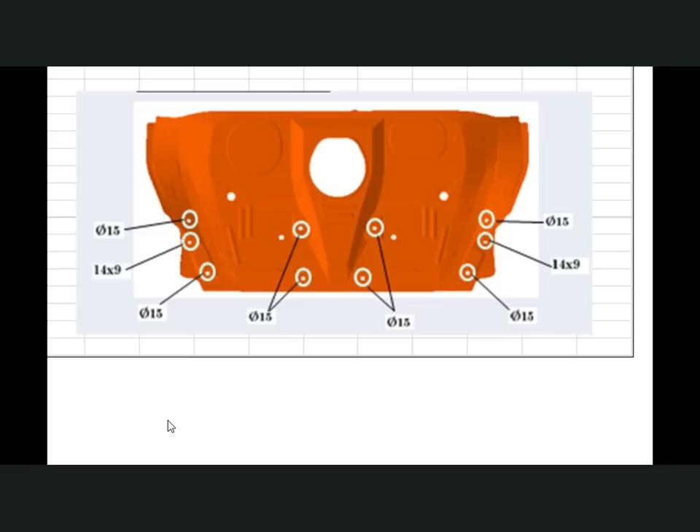In this video we will design the hydraulic punching machine for sheet metal parts. You can see there are 10 holes required in this sheet metal part, all on different surfaces and angles, and we require a machine for piercing these holes.

You can see the IGS data, and there are two datum holes in this main part, along with the piercing holes required for this part.

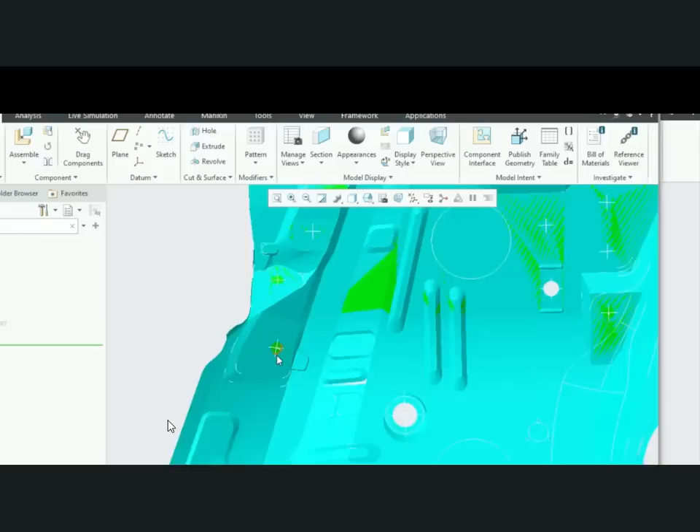The surface of each piercing hole is different, and we require a punching unit parallel to each piercing hole and its surface. We can calculate the angle.

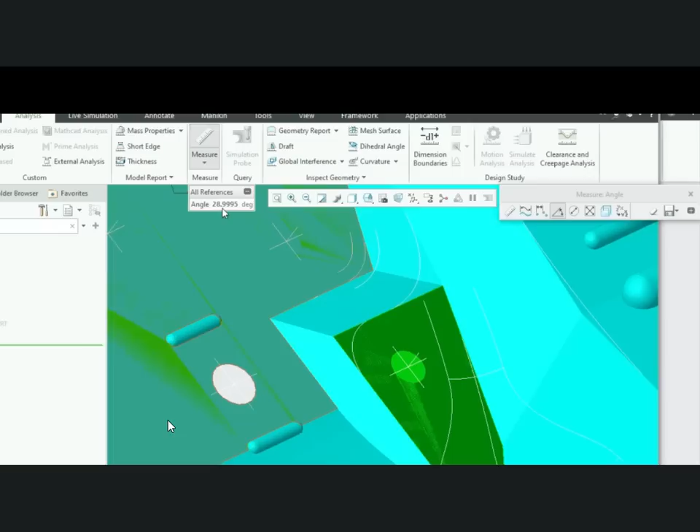There is approximately a 29 degree difference between the holes. So now we require a punching unit parallel to their surfaces to punch the piercing holes as per their required surfaces.

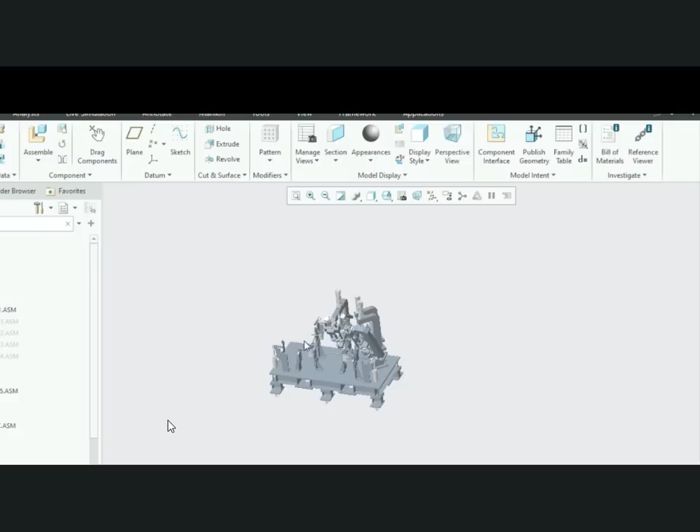Now this is the hydraulic punching machine we designed, and here we hide the punching unit.

First of all, we will see how we clamp the main part in this jig. This is a pneumatic clamping setup for this part.

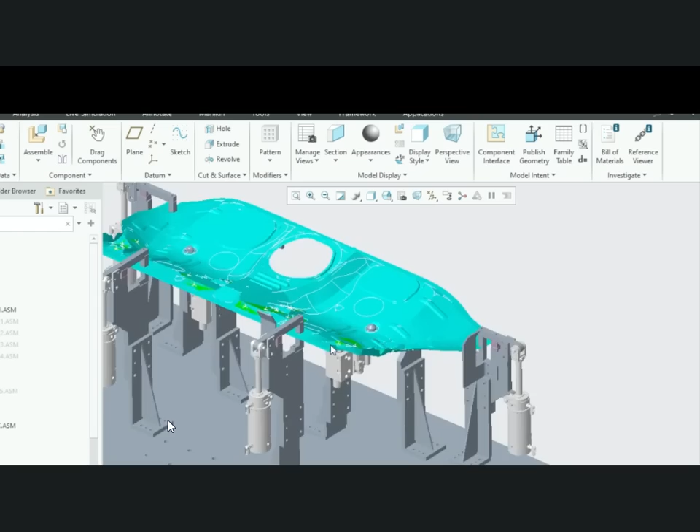There are 4 locators, clamp locators, to clamp the part, and now 2 datum locators.

These are one round pin and one diamond pin, and there are 2 ejectors we install to eject the part after piercing.

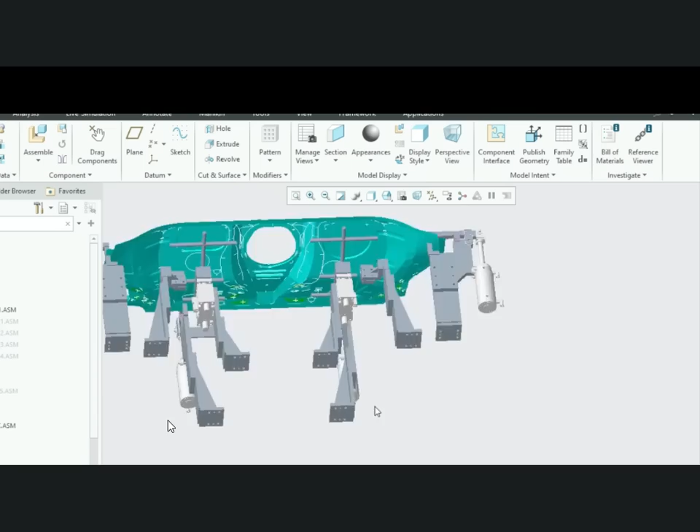You can see very clearly the design of the ejector.

There are pneumatic cylinders installed to eject the part, operating in up and down conditions.

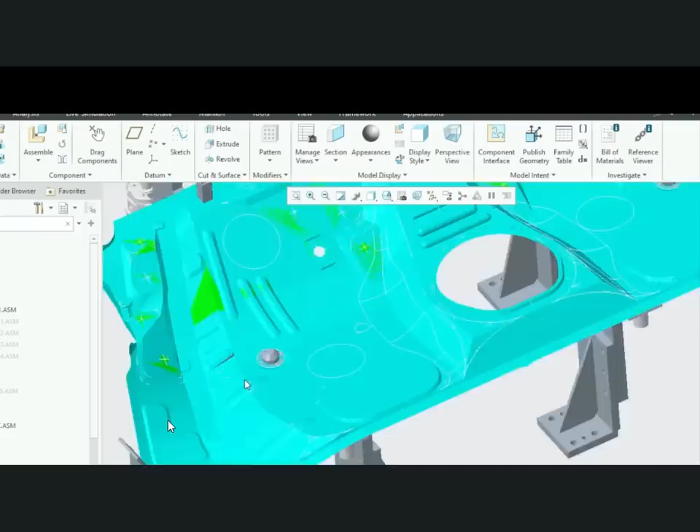And these are the datum pins. You can see these datum pin designs are specially designed as per standards, for this main part.

These are 2 locators, and there are 4 locators to clamp the part and avoid any variation. This is the design of pneumatic locators with cylinders.

Now you can see the datum pin locator design. These are very standard designs.

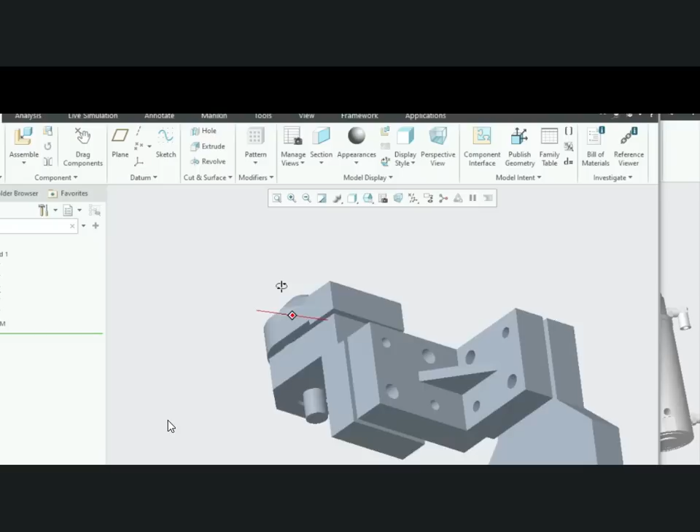And these are the ejector locators, shown separately for clarity. This is the pneumatic cylinder installed to eject the part up and down as per requirement.

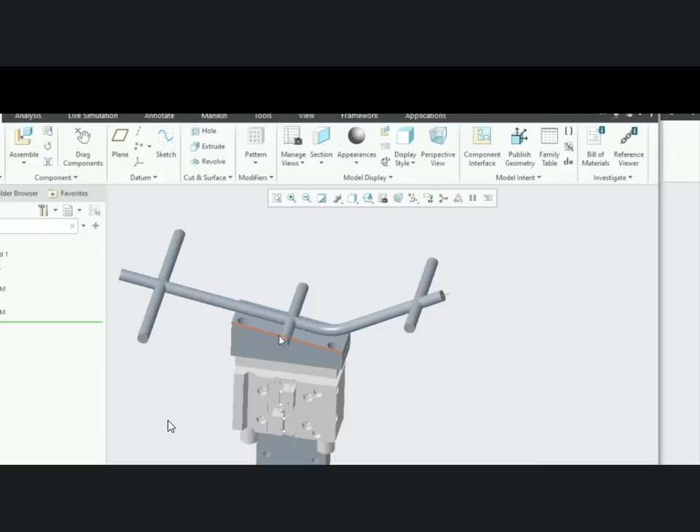This is the pneumatic clamping of the part. After that we will see the punching unit.

This is the main part, the punching unit for every hole, and how we designed it. You can see, and I'll explain.

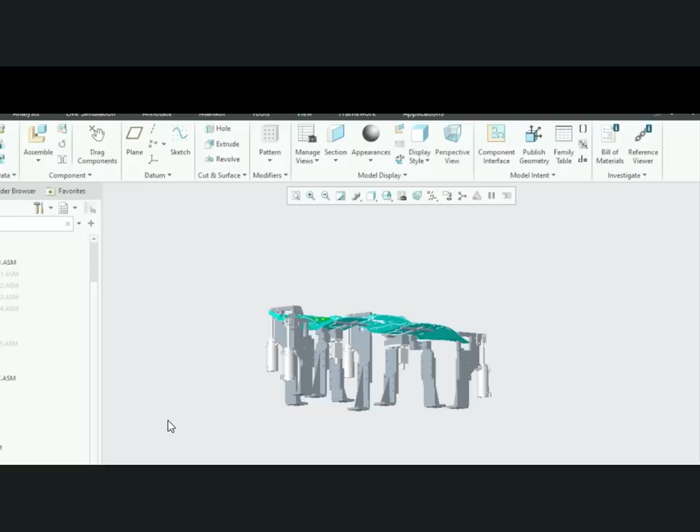This is the base plate for this machine, and we also designed an area for the forklifter.

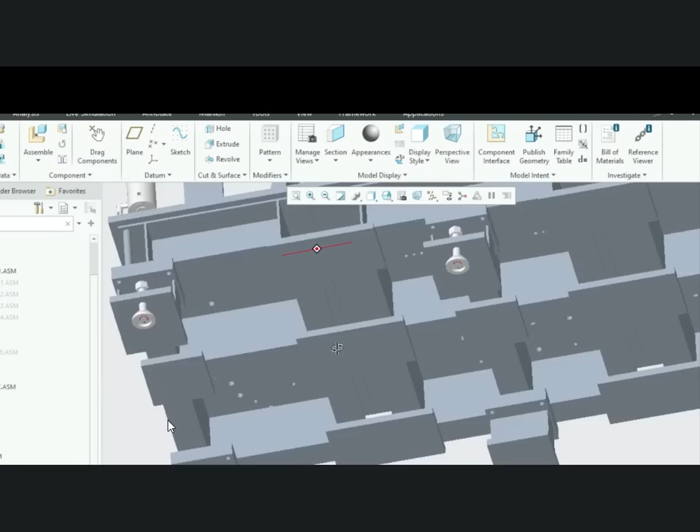This is a very special design to easily shift the jig anywhere in the production line.

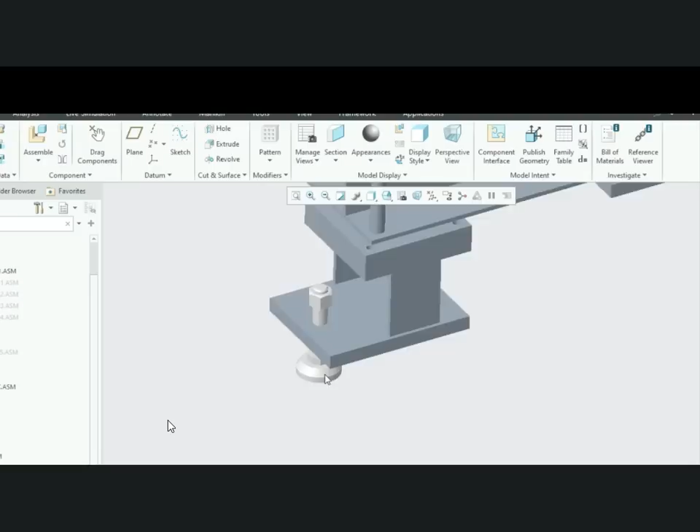We also installed an adjustment pad in this base plate, to maintain the height and levelness of the base plate.

Now we will see the punching unit. This is the first punching unit, and you can see that...

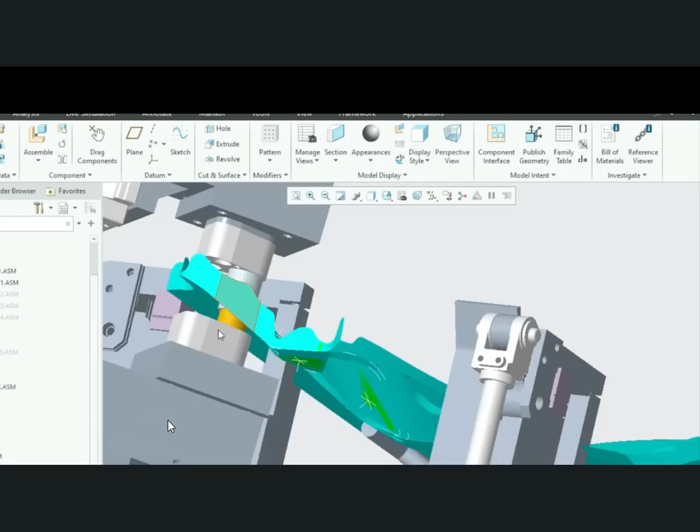the punching unit is designed as per the plane of the surface of which piercing hole we require.

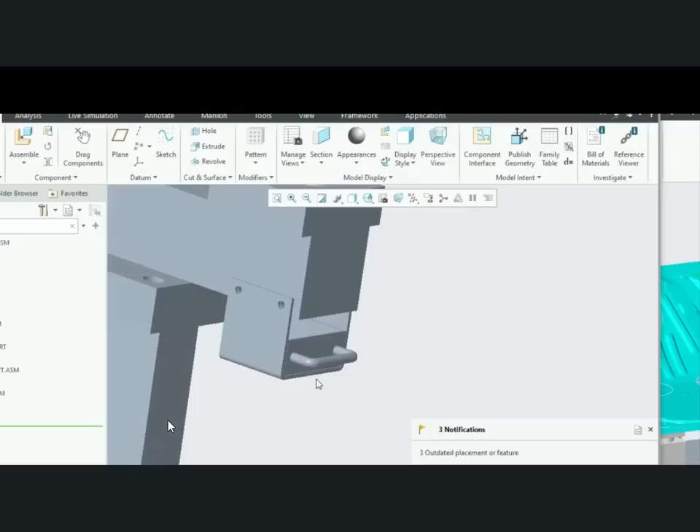Now we can see separately what the design of the punching unit is. These are the retainer for the die insert and also the retainer for the punch insert, which we will install.

It is very easy. There are also 5mm shim spacers installed to adjust this retainer height.

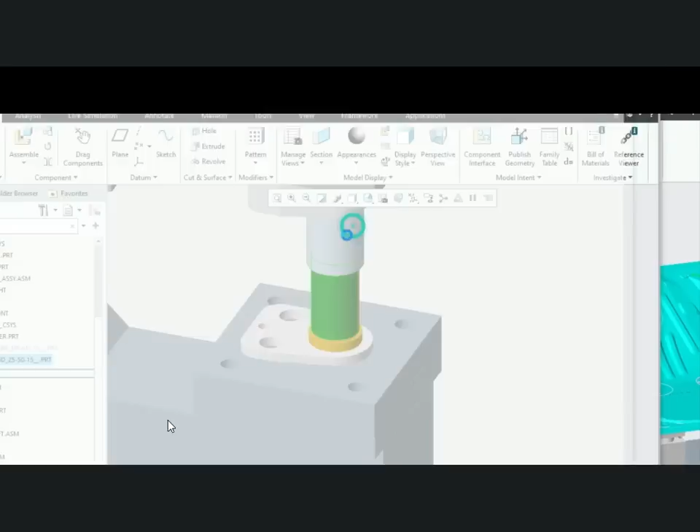And this is an insert, the die insert. Now I think you understand.

This is a urethane block for the punch. We install a urethane block in the punch, and you can see the punch design.

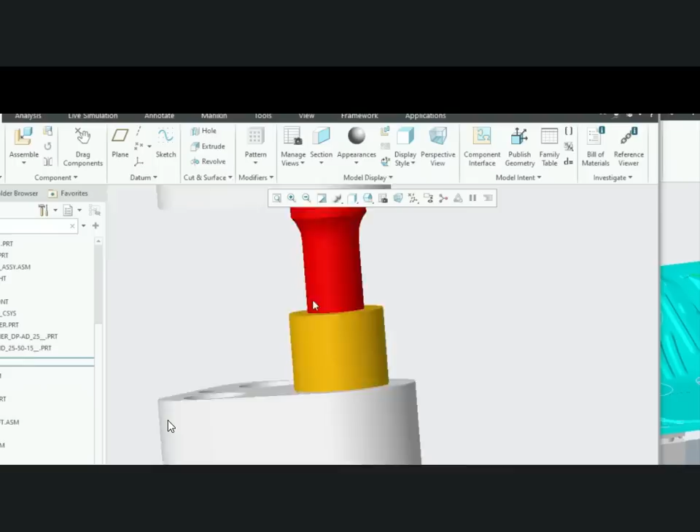It is the same as the die insert. This is the punch insert, which is installed in the retainer as well.

On the bottom side we install the 5mm spacer. This is the retainer for the punch, and this is the spacer.

And this is the punch plate. This is the punch plate, installed separately.

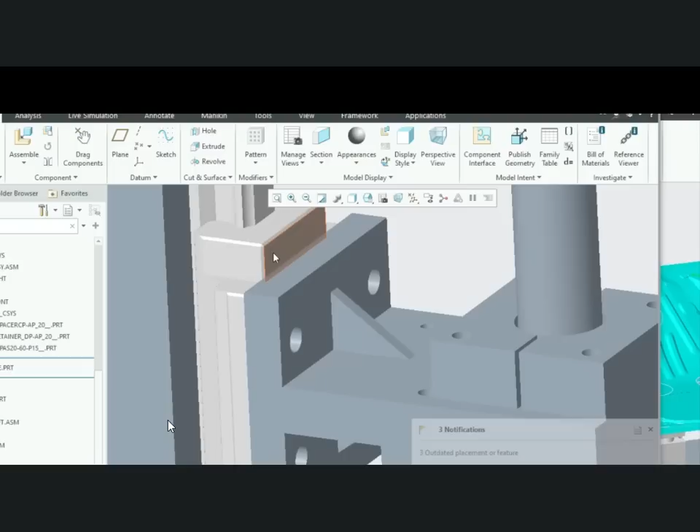This is the upper part, the LM guide support bracket, used to install the LM guide and punch unit. This is a very main part.

This part will be traveling after the cylinder operates.

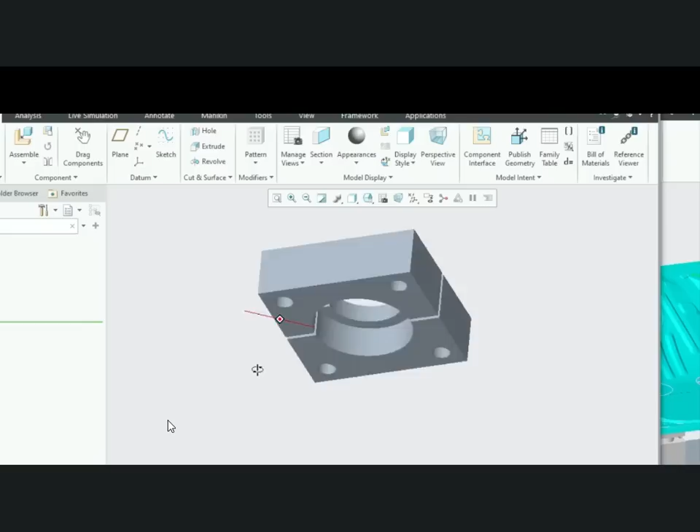This is the coupler unit to couple the shaft, a very special design where we easily avoid any threading as well.

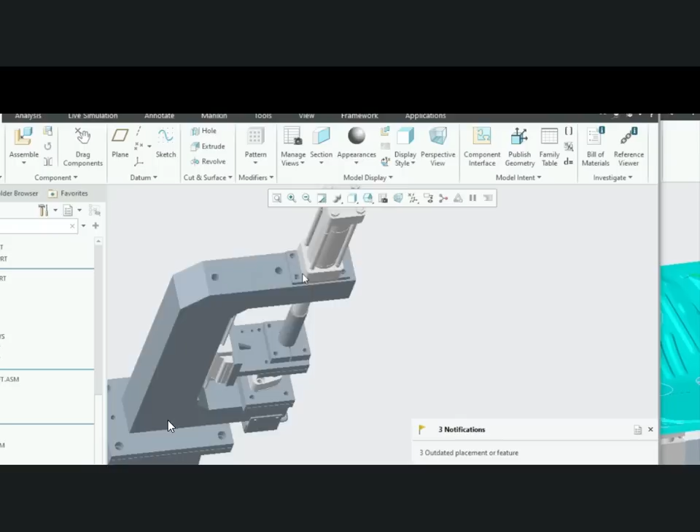This is the coupler shaft, and this is the cylinder shaft. The cylinder stroke is 150, and this is the column for the punching unit.

This is a hole for scrap of the sheet metal part after punching, and this is the main part for this. This is a stand.

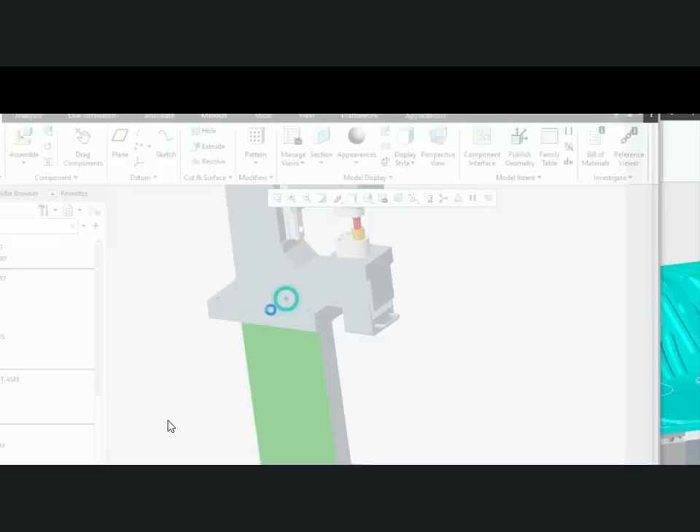The surface of this plate is parallel as per the surface piercing hole. This surface is parallel as per this degree. We will define the degree in this stand.

This is a box for salvage of the sheet metal parts to drop into this box. This is the first unit. You can see this is the first unit for a single hole of piercing.

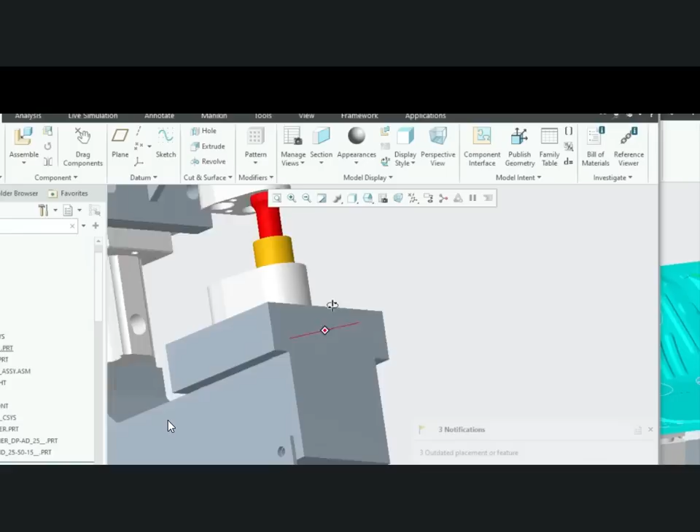These are also die plate, die back plate as well. You can see them installed in this jig, so that it is very easy for adjustment of all parts.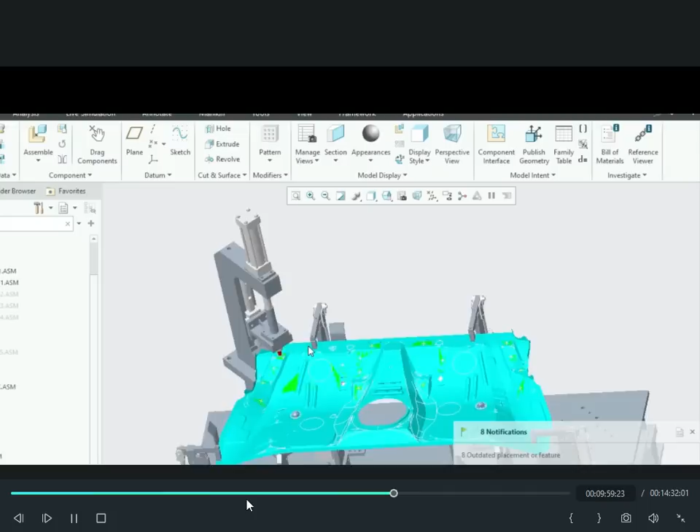This is the second unit. You can see which is very near to the first unit. This is the first hole and this is the second hole for the second unit, same as the first unit, but

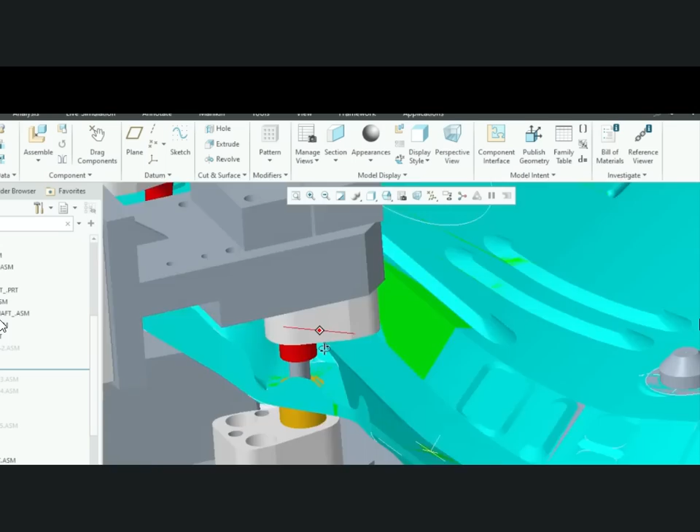the unit is tall as per parallel to this surface of the piercing, and the angle will be defined on the bottom side of the stand. Same as the first unit, same parts we will install for punching, but the angle of the stands are different. You can see the second unit.

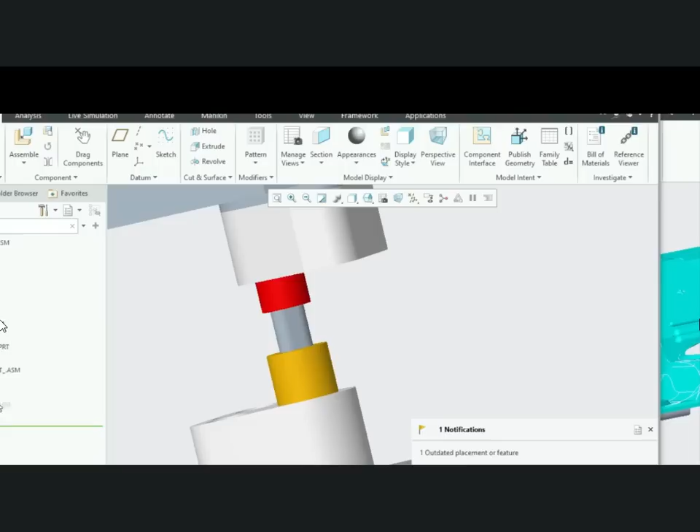These are the same design, same retainer, but the hole sizes are different. This is an oval hole. The first unit is a round hole, but the parts are the same as the first unit.

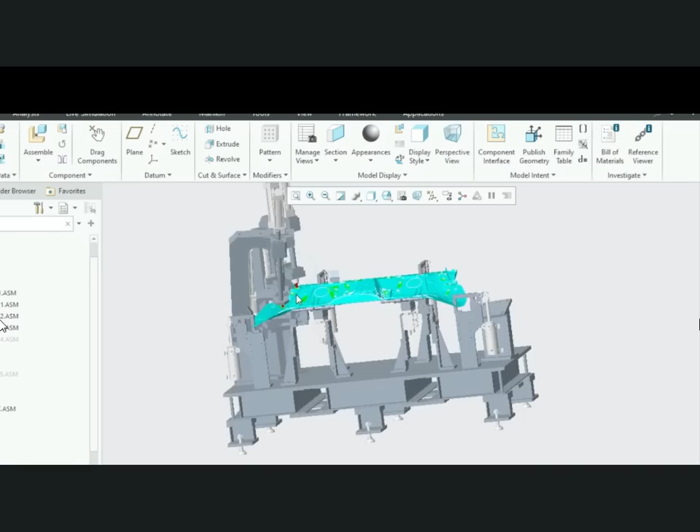This is the third unit. You can see the angle of the third unit. These are parallel to the piercing hole surface, which becomes a 90 degree position. When we punch the sheet metal, it will be at this 90 position.

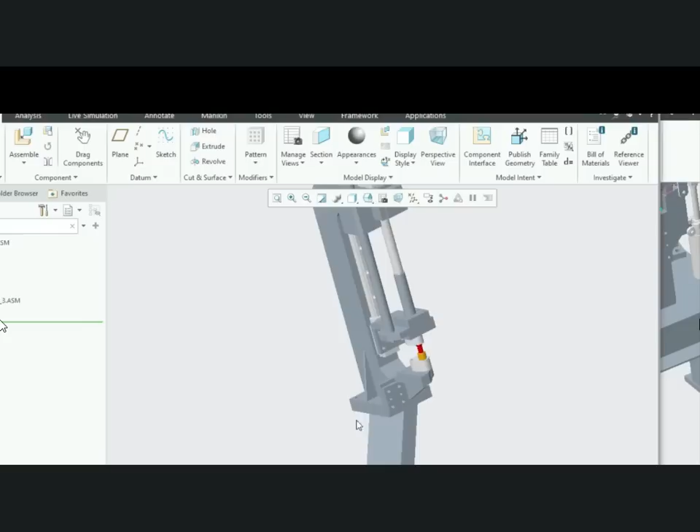So you can see the bottom side of the stand. We will define the angle in the bottom side stand, but in the upper side punching column unit these are the same. In this inner side stand, bottom side stand, we will define the angle.

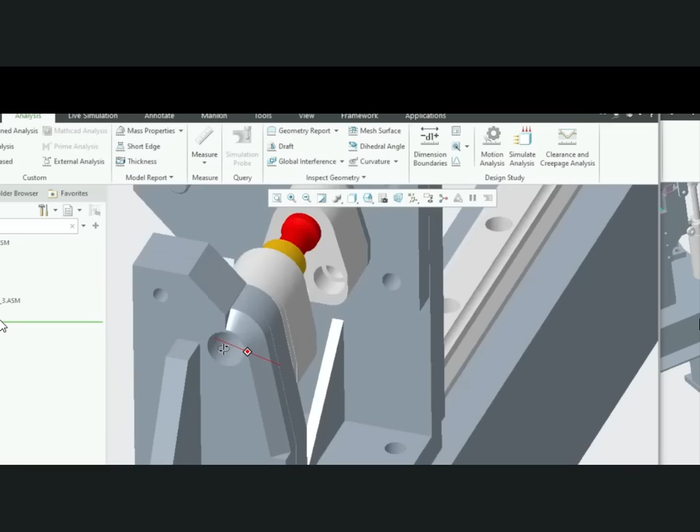You can see the angle we will define as per parallel to the piercing hole surface, and also we will design to verify the interference between the parts and between the other units. It is very necessary to check all things and interference.

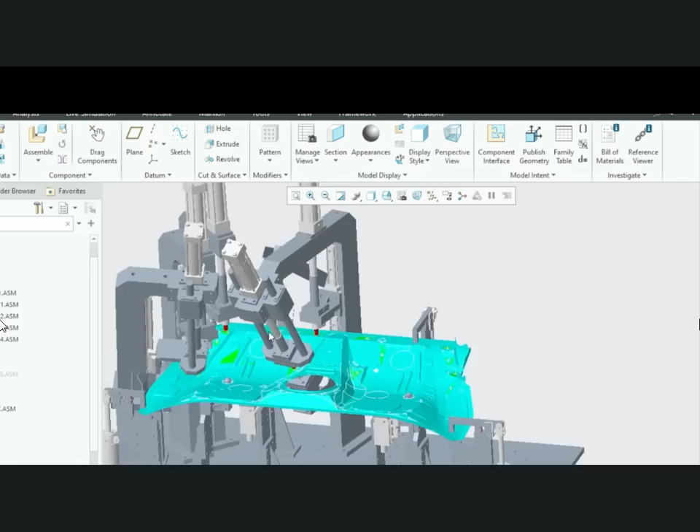This is the fourth unit. You can see this is a very special unit. These are two cylinders installed, two punching units installed in one column, and one is straight and another is very critical, I think it is 29 degree.

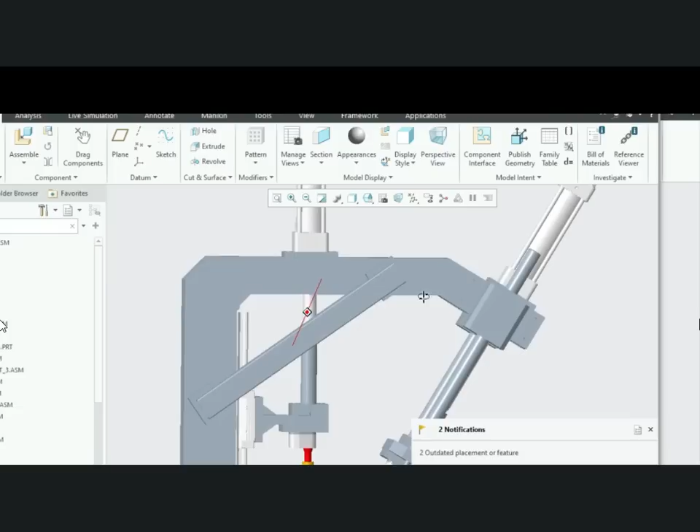We will define 29 degree for punching. This is a very special unit, and you can see reinforcement pipe also given in this unit.

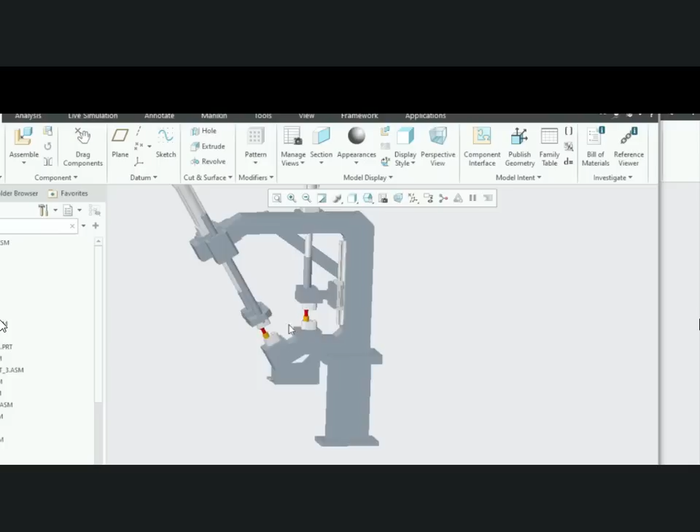The parts are the same as the first unit, but we will define another angle of 29 degree for the second hole in this one unit. These are the two holes we will define in one unit, piercing unit.

So this is our design concept, how we will design for sheet metal piercing as per parallel to their surfaces. But in the press you can see the 31 degree.

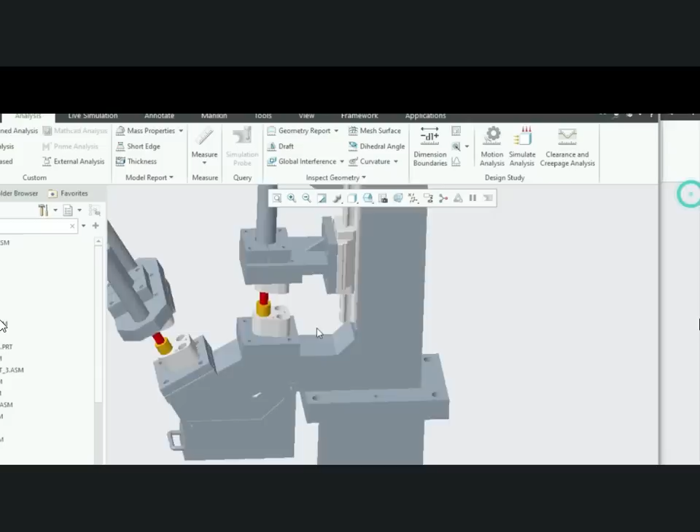You can see the angle, the 31 degree, and on the bottom side we will define the box. Also install the box for the salvage of the sheet metal parts after punching.

This is a guide block, and also a brass bush. We will install the brass bush, or we will install the bearing.

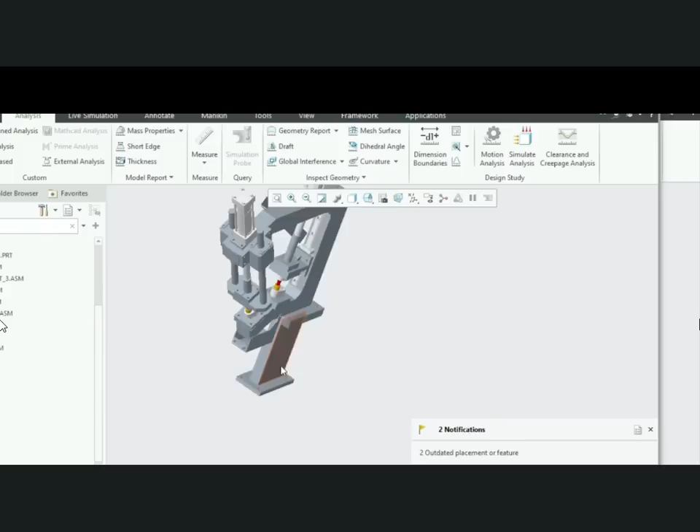These are two guide shafts we will install in this unit, and so the other side is also a mirror of the first side.

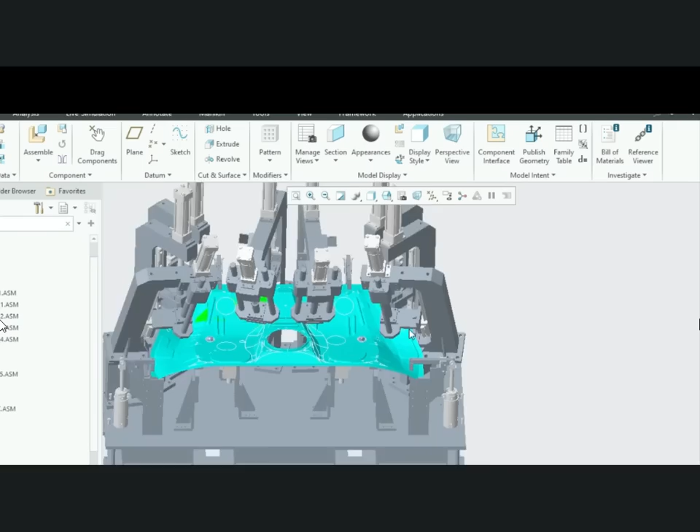So that is the machine we will design for the sheet metal punching piercing hole. I think you will learn a lot from this design, and this is a very special design for a special purpose machine.